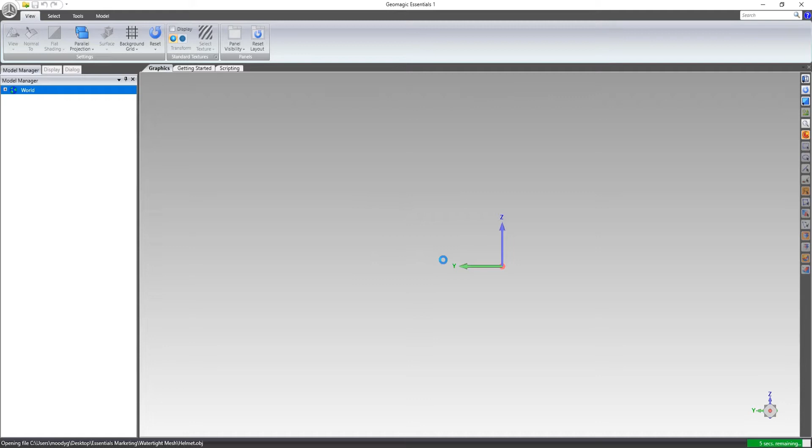The software then displays a unit pop-up asking me to specify the units for the data. In this case, we'll leave it on millimeters because that's the units that I scanned in. Then I'll select OK. The next pop-up that is displayed is the Mesh Doctor pop-up. It asks me if I want to run the Mesh Doctor tool right away. I'll select No this time because first I want to turn off the texture.

To turn off the texture on the mesh, go to the Display tab next to the Model Manager tab on the top left-hand side of your screen. Scroll down to the Texture checkbox and uncheck it. The model then will turn blue, which is the standard color for mesh models inside Geomagic Essentials.

Next, I'll run the Mesh Doctor tool. In the Scan Tools ribbon, in the Repair group, select the Mesh Doctor tool. This tool will automatically run and identify errors in the model in the dialog box. It will also display errors on the model in red. Select Apply to run the command. This may have to be run a couple times. Once there are no errors, select OK to exit the command.

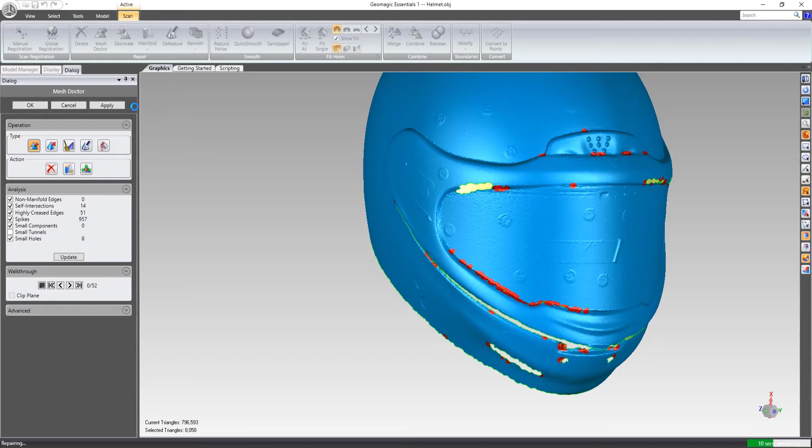Next, I'll want to fill holes. We will be doing this in several ways. First, I want to make the bottom as flat as possible. To do this, I need to put down some reference geometry. I'll start by best fitting a circle to the bottom boundary. In the Model Tool ribbon, I'll select the Circle dropdown and then select the Natural Boundary option. I'll then highlight the boundary. The software will automatically best fit a circle to that boundary.

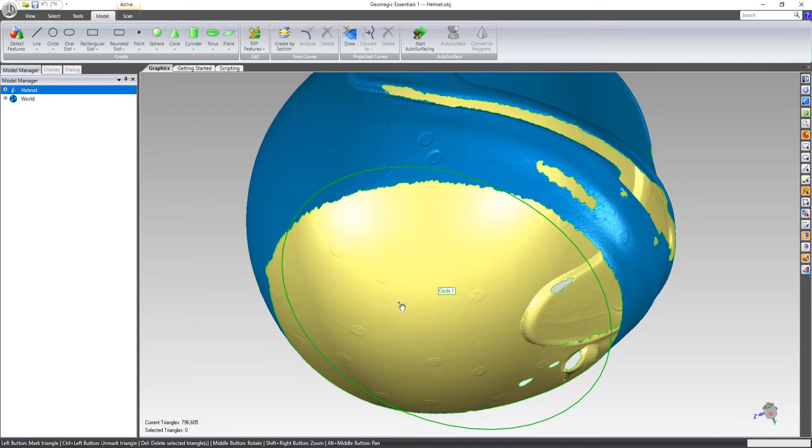Then I'll use the circle to place a plane. Again, in the Model Tool ribbon, I'll select the Plane dropdown. Then I'll select the Perpendicular to Axis option. In the dialog box, I'll set the axis as Circle 1, and then I'll set a point as close as possible to the bottom of the mesh. This will put down a plane that I can then use to roughly square my part.

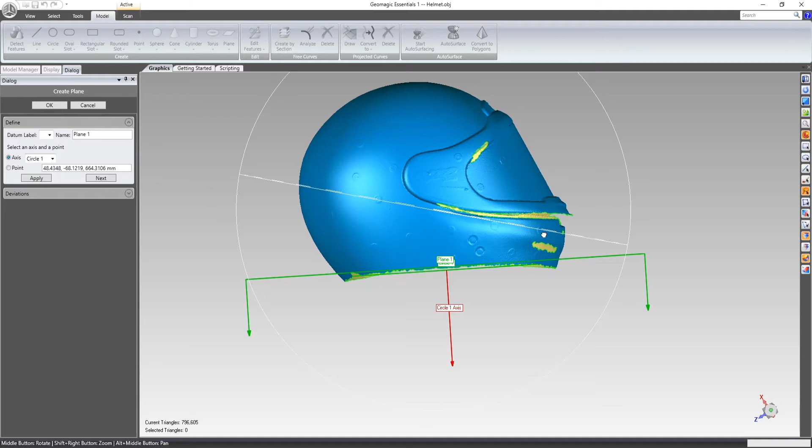To roughly square my part, I'll first orient the model so that the plane is parallel to my view. Then, to correct the angle, I will left-click and drag on the outside of the viewing window to make the plane straight. To verify the plane is roughly straight, I'll move the model down towards the bottom of the viewing window and line it up with the border of the viewing window.

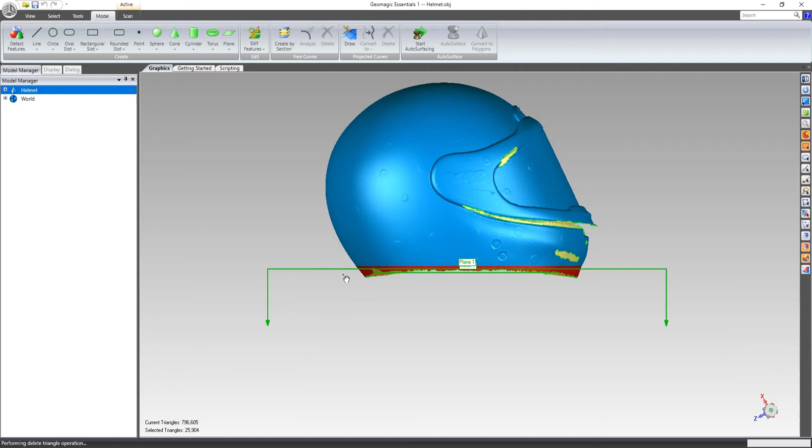Once the mesh is roughly aligned to my view, I'll use the Box Selection tool to trim the model. On the right-hand side toolbar, select the Box Selection button. Towards the bottom of the right-hand side toolbar, select the Through All tool. This will allow the selection to go all the way through the model. Next, I'll make a selection on the bottom of the model, then delete it to make the bottom of the boundary roughly straight. If I zoom in, I can see the boundary is still jagged.

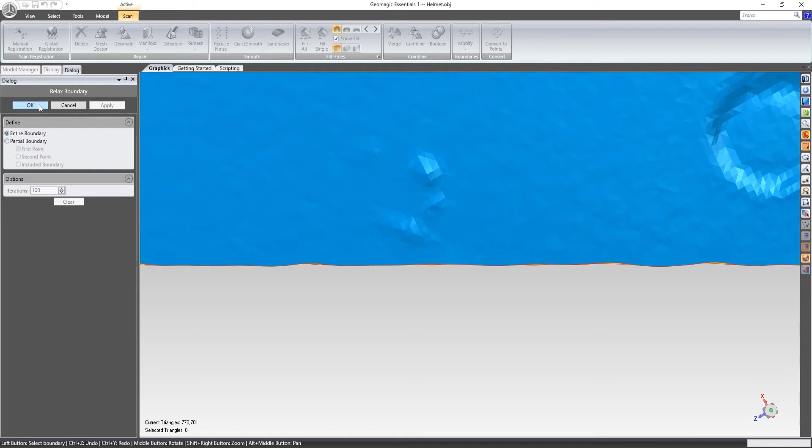We can compensate for this by using the Modify Relax Boundary tool in the Scan Tools ribbon. In the Modify Relax Boundary dialog box, I'll set the iteration to 100. This will smooth the bottom boundary, which will give me a better mesh surface. Now I'm ready to fill the holes with the Fill Single tool in the Scan Tools ribbon. In addition, I'll also change the fill method to flat.

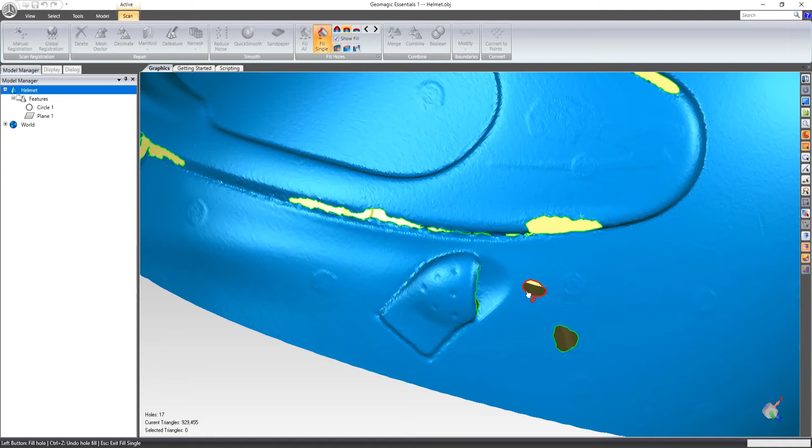Once the large hole is filled on the bottom of the helmet, I can then start filling in the other holes individually. Again, I'll select the Fill Single tool in the Scan Tools ribbon. Then, after locating the next hole to fill, I'll change the fill method to the middle option, Tangent. Without leaving the Fill Single tool, I'll navigate to the next hole to be filled and fill it, changing the method if needed. I do not need to leave the Fill Single tool as long as I'm filling individual holes.

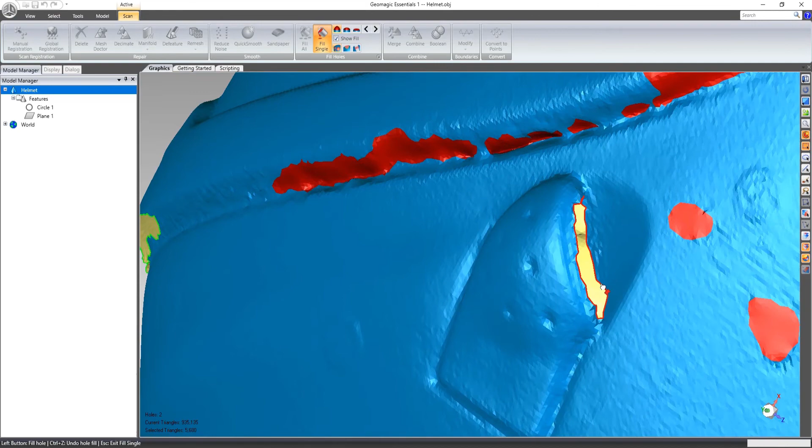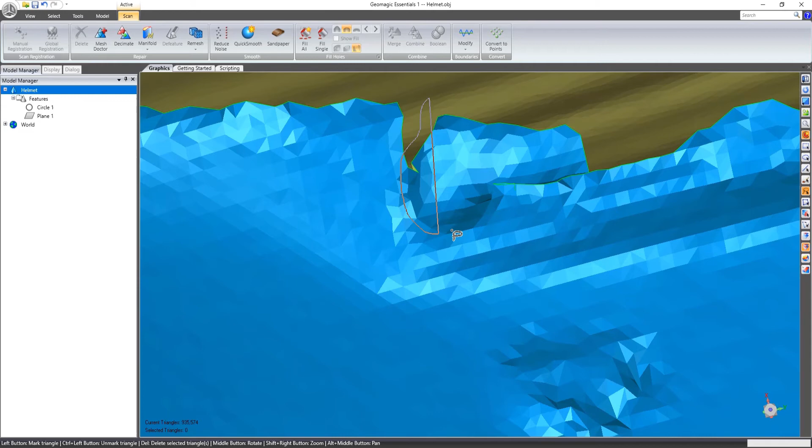Finally, the last hole is too large to fill all at once, so I need to remove some polygons to split the hole up into sections. To do this, I'll unselect the Select Backface Mode tool in the right-hand side toolbar. I'll also change my selection mode to the Lasso Selection tool. Then I'll select the area to be deleted. Deleting has caused some triangles to be free-floating. I'll deal with them in a bit.

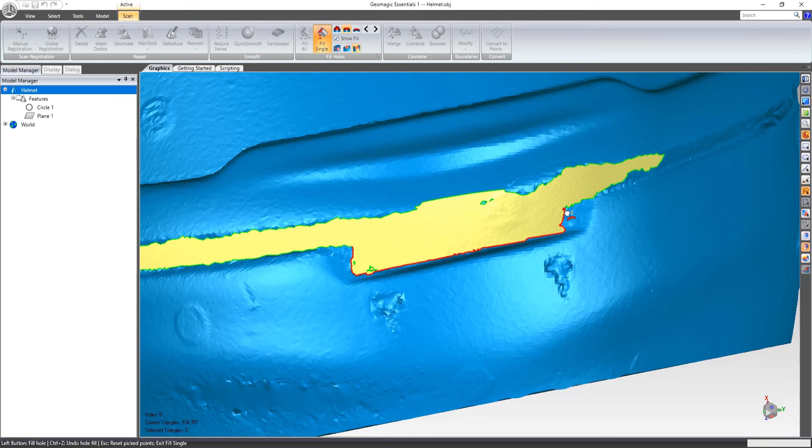Now I want to fill the bottom portion of the hole. To do this, I'll change the fill type to Bridge. This option can be found in the Scan Tools ribbon in the Fill Single tool below the Fill Methods options. Then I'll select a point on one side, left click and drag to the opposite side.

Additionally, if I want to create a point-to-point bridge, simply click on one point and then click on the point on the opposite side. Once the separation and bridging is complete, I can now fill the holes using the Complete fill type and the Curvature fill method.

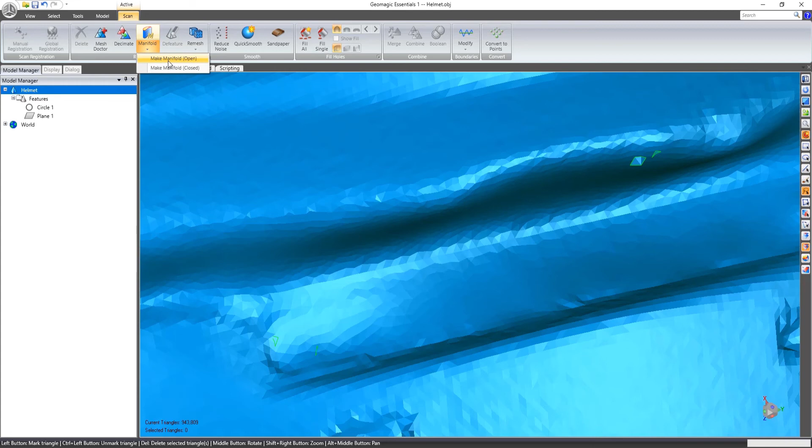Lastly, I need to remove any free-floating polygons from our model. To do this, select the Manifold dropdown in the Scan Tools ribbon. Then select the Make Manifold Open tool. The software will automatically remove any polygons that are not closed volumes. We now have a watertight polygon mesh. Today we talked about how to create a watertight mesh model using various tools in Geomagic Essentials.